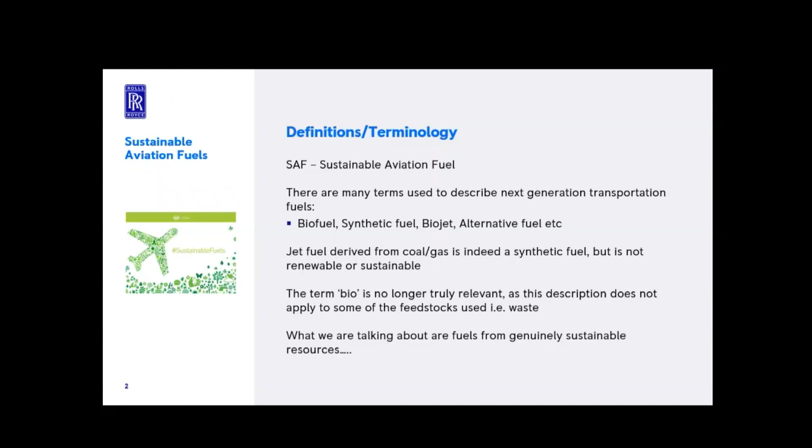If we take a big step back, why do we bother doing all of this stuff? There was the Paris Agreement that was agreed in 2015. That's not an aviation target, but an overall climate target that we need to control global warming to no more than 1.5 degrees relative to pre-industrial times. To be honest, I haven't found an exact date, but it's around 1995.

Because if we trend what the average temperature of the ocean has been between 1995 and now, it's increased. If it continues to increase at that rate, then by 2050, a large portion of the Earth will no longer be inhabitable. So that was the target that was set by the Paris Agreement. And there are many different industries which contribute to CO2 production, like the forestry industry, agriculture, and all that kind of stuff.

And the contribution of aviation in the overall perspective is relatively small. So it's about 2% of the total CO2 production, of which business aviation is also an even smaller percentage. But the reason that aviation needs to do this is that aviation produces a significant amount of other pollutants that are non-CO2, and it's considered to be the fastest growing polluting industry over the next period of time. So that's why we have to do this, and why we want to do this.

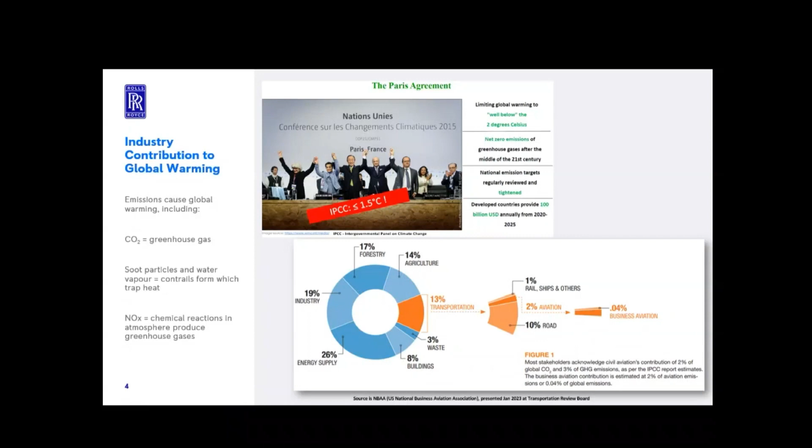Aviation's contribution to global warming is not just a CO2 effect, it's also a non-CO2 effect. And if we had continued to go without the pandemic, if we track the red line to the top, the contribution to global warming by 2050 is predicted to be about 0.1 degrees Celsius, which might sound really small, but it's massive. So that's part of the reason why we need to do it. And then the other lines are kind of showing what would be the targets that we want to set. And so the target based on the Paris Agreement is that we have a long-term decline of minus 2.5% per year after 2024.

What has the European Union done to mandate this? They've set minimums for the amount of SAF that needs to be provided at European airports. And this means that every airport across the EU, by different periods of time, needs to be fueling aircraft with a fuel that's blended with a certain blend percentage of SAF. So the targets, at least in the short term, are 2% SAF by 2025, 6% SAF by 2030, 20% SAF by 2035, and 70% SAF by 2050.

And a subset of that blend percentage is also a power-to-liquid type fuel, which is a fully synthetic fuel, which I'll describe briefly on another slide. Yeah, and those requirements will apply for any flight leaving the EU, independent of where it's landing. So that's a bit of the background on why exactly we need to do this and why Rolls-Royce has supported this initiative so much.

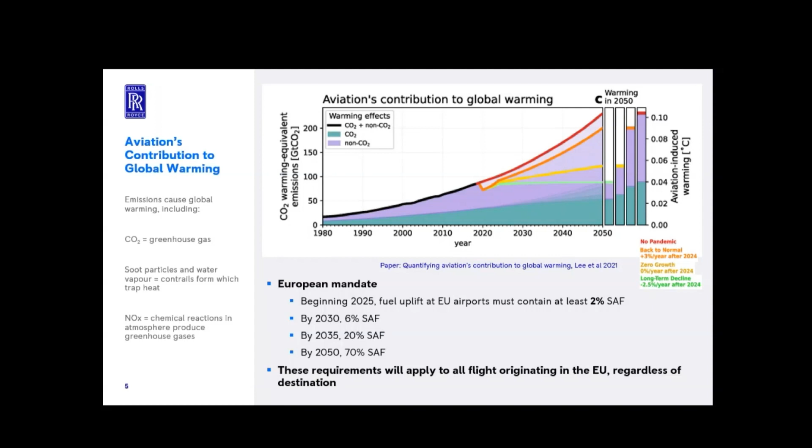There was then the net zero report that was published in 2021. And this report describes how our company will be able to hit net zero by 2050. It's quite a massive report. It's publicly available, very interesting stuff. But from a SAF perspective, there was a major target that by the end of 2023, we will have tested all of our in-production engines on 100% SAF, which for business aviation was the 710, the 725, the Pearl 15, and the Pearl 700, which we achieved by the end of last year. So we've hit that target. And I'll discuss a little bit about the results of those tests later on.

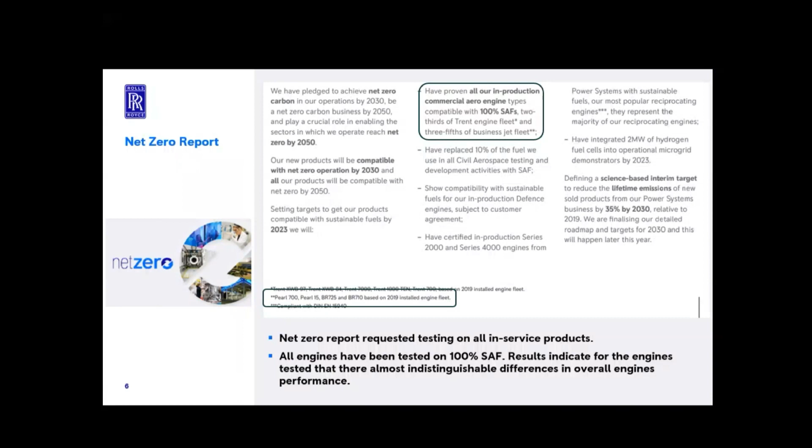Okay. So that's the background. And then what is the overall strategy? This is not just a purely Rolls-Royce strategy, this is an overall strategy. And I think one thing that's really important to say about sustainability and about SAF is that this is not about Rolls-Royce and what can Rolls-Royce do, that's part of it, but this needs to be an industry-wide collaboration. We can't do this alone. We need to have support from the government, from our airframers, and from other engine manufacturers.

So the journey to sustainability is going to be very, very difficult. It's not an easy problem to solve. And I think the boundaries of our company have a huge amount of influence, and we need to be working together with the other companies in our realm to really be making a difference.

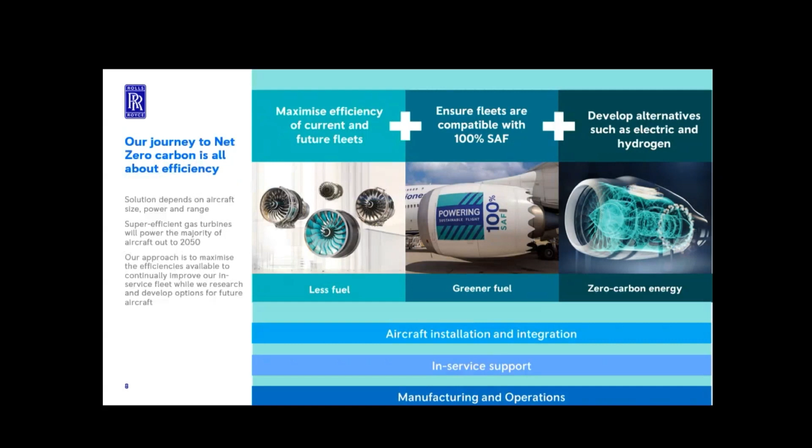So overall, the journey to net zero, there's many different ways to look at it, and we need to pursue multiple solutions. So the first one is obviously burning less fuel. So if we make highly efficient engines and then aircraft that reduce the amount of fuel that's burned, that's a really significant part of getting to net zero, because the less fuel you burn, the less CO2 and other pollutants you'll then produce.

If you go to the far right, these are alternative sources of aviation. So electric and hydrogen, those are considered revolutionary technologies. Those would require a very new certification process. There's a completely new infrastructure that would be required for those. But those will take more time, so that's not something that we could implement. There are also not necessarily solutions for the full range of different flights based on those types of technologies right now.

And the reality is that we have a fleet of many aircraft that are flying around, and those will continue to fly for another 50 years. And so you need something that, without massive modification or investment, would be able to become less CO2 negative. And that's where SAF comes in. So SAF is really a greener fuel.

And these three types of activities need to be really happening in parallel in order for us to hit our net zero targets. And this sort of shows the civil aerospace market and technology landscape until 2050. So there's many different types of flights, and every different type of flight might have different solutions that are relevant to them. So UAMs, for example, there's a more feasible possibility that could be serviced by a battery technology.

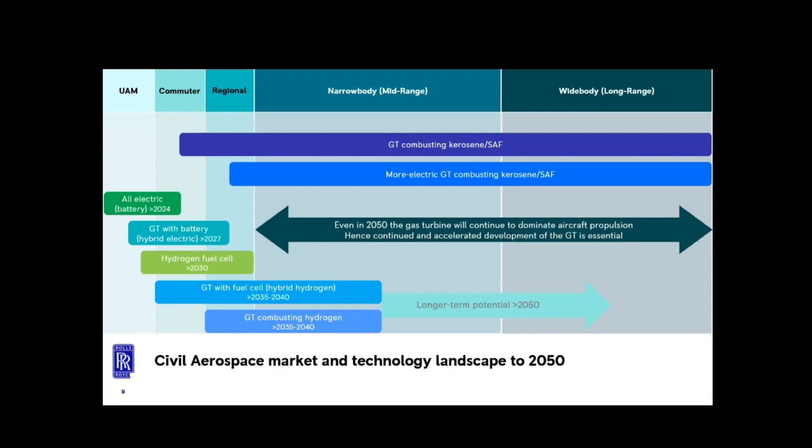And there just isn't a battery that exists at this time that could power an aircraft across the ocean. And so those types of flights will very likely continue to need a gas turbine burning something to be able to service. And that's where SAF comes in as a relatively elegant solution. There's a lot of long-term potential for the other types of technologies, but that's going to be, from a certification perspective, much more challenging, and it's still quite new in its development phase.

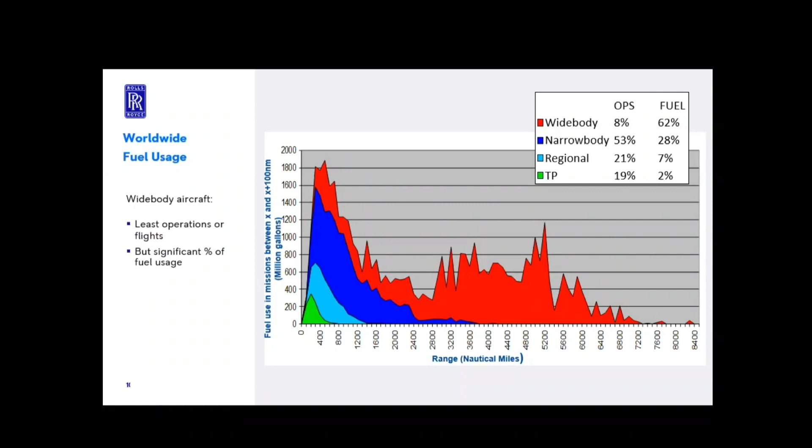Okay, so a little bit more about SAF itself. How is SAF made? So there's currently the different types of SAF that are approved. There's 8 different pathways that have been approved with ASTM, and currently they're all made from bio-waste mass. So what that means is that there's different waste products that could be collected from different industries, and those can then be processed and then used to create a kerosene equivalent fuel. So there are several different types. There's Fischer-Tropsch process, which is basically making fuel out of garbage, carbon garbage.

Hydroprocessed esters and fatty acids. So most of our engine testing has been done on that type of fuel. That fuel is primarily produced by using used cooking oil. So that's a very feasible way of making fuel. Then there's other pathways, which include agricultural wastes, oil, fats, and greases.

And then algae is an interesting one, because algae is something that's very quick to grow. It requires like no water, and it can be grown in mass amounts. This pathway, I haven't actually seen any fuel coming out of it, because it's still in a relatively small volume, but there's a lot of potential to be able to produce fuel using that type of pathway.

And what that means, at least what's been approved now, is what's called a drop-in solution. So a drop-in solution means that you can blend up to 50% of your SAF synthetic blend component together with 50% kerosene. It then gets recertified, which means a sample is taken. It's compared against the specification for a fully kerosene fuel. It gets relabeled as Jet A1, and then off it goes.

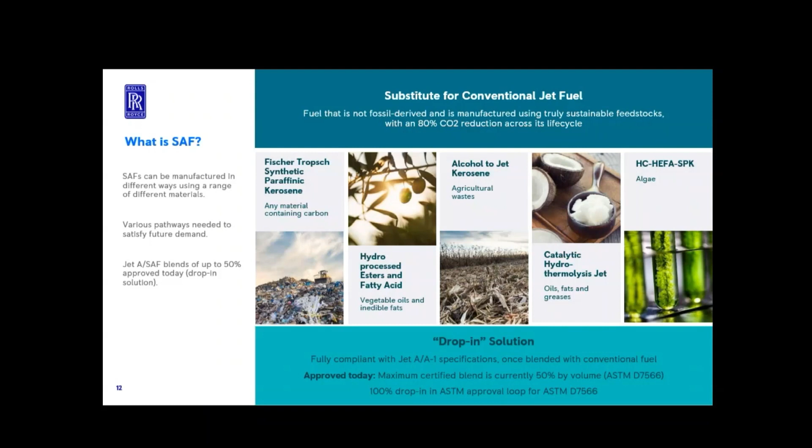So on the different phases of the ASTM process, there's Rolls-Royce, GE, Safran, Boeing, and so on. And they all sit there and they're responsible for reading all the reports that are generated after a certain amount of testing. And then they agree, yes, we approve at this phase that the fuel is meeting the requirements or not. It takes years to go through this process. This is not straightforward and a significant amount of testing.

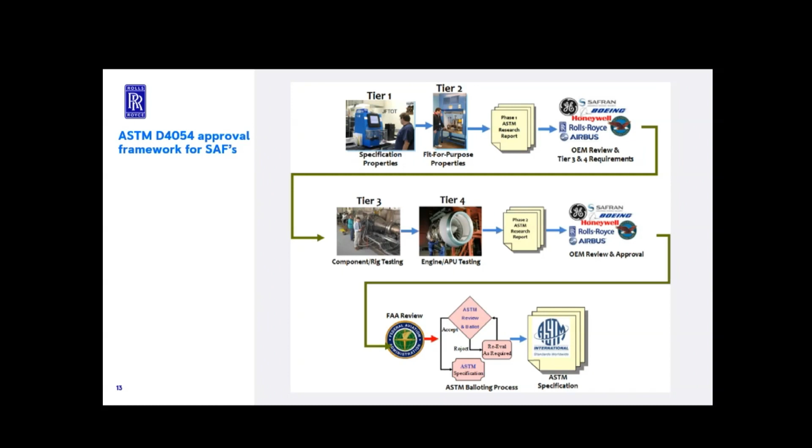But just to give an overview, every single pathway that will get approved has to go through this whole process to be able to show that it's in fact usable in the field. And this process is defined by D4054. That's the approval process specification.

The SAF landscape is definitely evolving. So like I mentioned before, there's 8 pathways that are already industry qualified. Some of them were qualified back in 2009, which is really interesting because SAF is not new. It's been approved for quite some time. It's just that it's never been promoted that much. And the big reality about SAF is just it's not available. That's the big issue about it. We're hoping that that will improve. And there's a lot of initiatives in place, like the ones I mentioned before by the European mandate, that it will start to increase. But yeah, some of the pathways have been approved since 2009.

And some of those existing pathways are approved up to 50%. And there's a lot of work ongoing now to demonstrate that it would still be considered a blend component, but you could use it up to 100% and it would still get recertified as Jet A1. So it's 100% sustainable. It's not a fossil-based fuel at all, and it would be qualified at 100% to be used on an aircraft. That's ongoing. That's sort of the second item here about 100% drop-in. So what's happened now is that the spec has been approved by the ASTM on what that looks like. And then the work is ongoing now to see how to get that approval for a fully SAF fuel at 100%. That would be ideal.

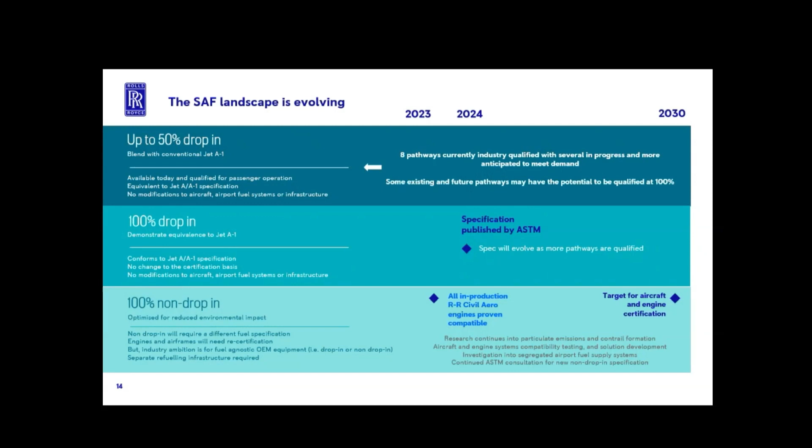These are the various feedstocks and the blend components that are available. A8 is the last one that just came in, a bit about how they're made and what percentage they're approved up to.

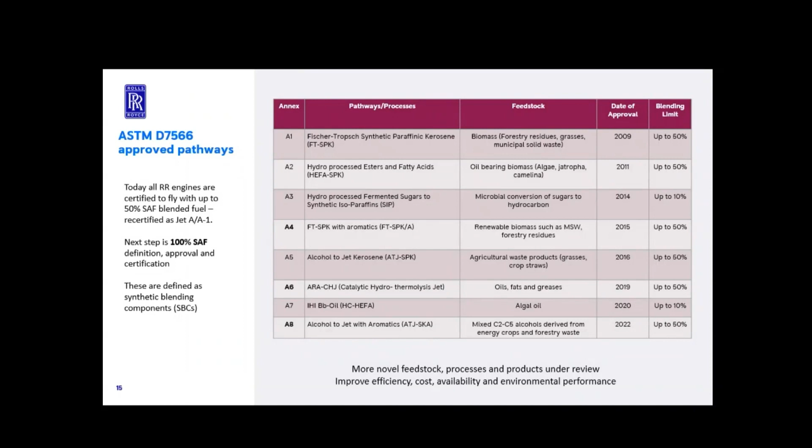So the A4, A6, and A8, these ones have the potential to be able to be used at 100% and still match a drop-in specification. So we haven't done any engine testing on those 3. We did all of our testing with A2. But there's a lot of work ongoing, and eventually, when those fuels are available at a certain volume, we could look into them more.

A little bit more about synthetic blend components. So there's a lot of different companies that are popping up all the time that are coming up with new feedstocks to be able to produce SAF fuel. So maybe some of the ones that are a little bit more well known. So Virent. So anybody who worked on the 725 flight would know about the Virent one.

So Virent in itself is just a synthetic aromatic, and that was used on the 725 flight tests because the engine didn't require it, but the fuel system supplier from Gulfstream said that they needed to have some level of aromatic due to some concerns about fuel leakage on the aircraft side. So we ended up blending with this Virent component.

I mean, a synthetic aromatic component is very powerful because if you blend it with a HEFA fuel, you would get a drop-in fuel. I would imagine in the future, this synthetic aromatic blend component will no longer be relevant because you could get it via some of the other pathways on their own. But that's a company that a few people might be quite familiar with.

Phillips 66. So this is a company that's basically taking car tires and then converting them into rubber pellets, and that could be used to make synthetic fuel. And this is one of the fuels that's looking like it has potential to be used in co-processing: all fossil fuel goes through a processing plant. You can take the same processing plant and inject a sustainable feedstock at the same plant and use the same process and get sustainable fuel out the back. And this is one of the feedstocks that's looking promising to be able to go through that process.

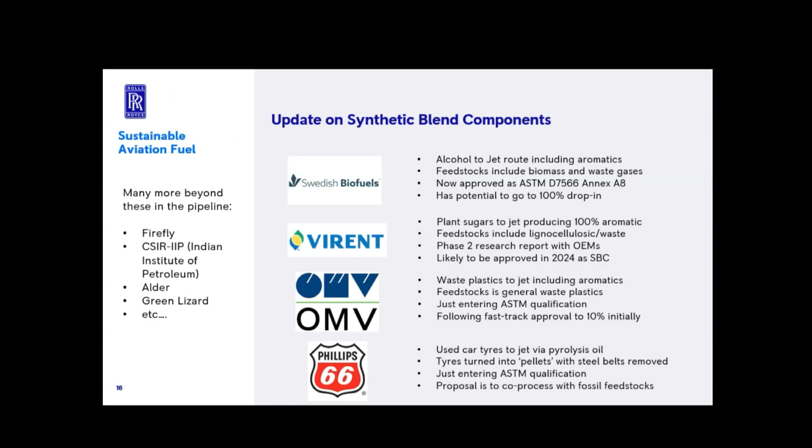SAF is not all rosy. There are definitely some challenges that have to do with it. The biggest one is cost. So SAF fuel will cost 2 to 5 times as much as kerosene, at least it does now. A lot of that is going to have to be managed. Does that mean flight prices will increase potentially? How can we manage the cost of the fuel?

I think that the more that it's available, the cheaper it will be. The more novel feedstocks that are developed, that will drive costs down. But at the moment, SAF is significantly more expensive than kerosene is. Actually, in the United States, SAF is cheaper than kerosene. The government has put in this Inflation Reduction Act, which affects that price. But definitely in Europe, SAF is significantly more expensive than kerosene is. So that's something that needs to be managed.

It's also scalability. So right now there's about 6 million barrels of aviation fuel used a day to power aircraft, which is about 300 million tons per year. And by 2050, considering the increase of the population of the Earth, increase of the population of the middle class, etc., we're going to need about 500 million tons of SAF a year to support aviation. That's a massive number. So there's going to be quite a lot of investment made to be able to get, let's say, 70% of that to be sustainable.

So the investment required, I already mentioned that. And then it really needs to come down to policies and investments, or initiatives that will be coming from the government. But I think there's no way we will be able to minimize global warming from an aviation perspective without SAF. I don't think there's any other elegant solution available right now. And SAF is not the end of the story, but it's a really good bridging technology until new technologies are available.

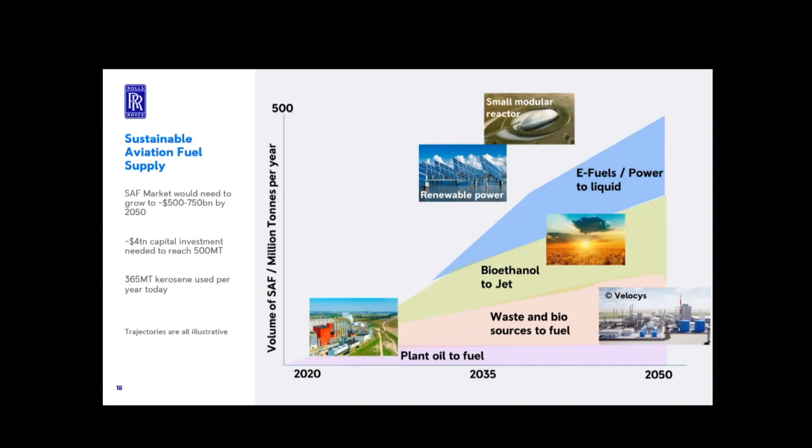A bit about power to liquid. So power to liquid fuel is basically using power from a sustainable source, so wind or solar, and then taking water to produce hydrogen, and then doing some sort of carbon capture and putting that through a Fischer-Tropsch process, and then creating liquid through hydrocracking. So it's a relatively simple chemical process.

There are a few facilities that are already open, but they make very little volume, at least right now. And the real challenge with this type of fuel, at least for the moment, is finding an affordable, sustainable energy source. The thing is that with a good collaboration in different parts of the world where the sun shines, I don't care if the process is efficient or not, because the sun's going to shine anyway. So efficiency is not the target, but being able to get an affordable energy source is a challenge.

This would be extremely elegant, because if you could set up these types of facilities right near airports, then you would be able to produce sustainable fuel near an airport. With the exception of the month of May, Berlin has been beautiful, but generally it's pretty gray here. It would be very difficult to produce everything based on solar power, but looking at other sustainable energy sources like wind or nuclear, that would be another option.

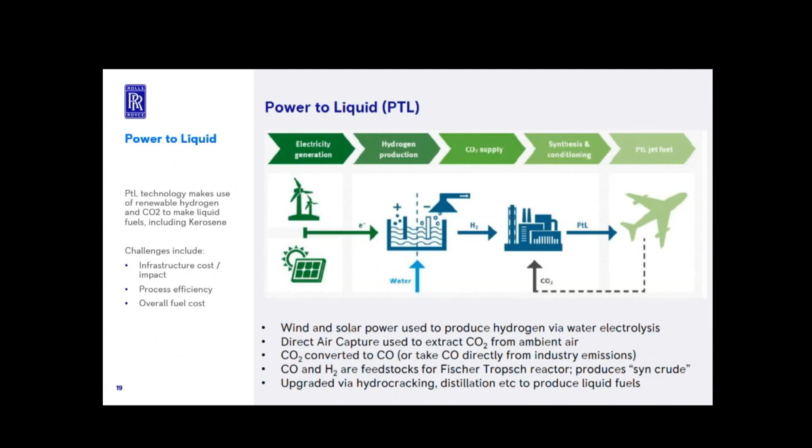So overall process efficiency, infrastructure, and costs, because these types of facilities don't exist yet, so they would need to get built. You have to keep in mind also that when you put up a new facility, you produce a certain amount of CO2. So it's all about the life cycle. So there's a big challenge about the initial investment, the initial production of CO2, and then making sure that with the fuel that you're using, reducing your global warming counteracts the increase that you would have by setting up all this infrastructure. So it's not easy.

So overall, what are some of the benefits of SAF? I've touched on them already. So overall life cycle reduction of CO2. The other thing about SAF fuel, at least the bio-based SAF fuel that we've been using right now, is it has a higher energy density by mass, which is very attractive. If you have an aircraft that's not fuel volume limited, that means that for the same mass, you could fly longer because you carry more energy in the wings of the aircraft.

If you have a volume limit, then it kind of works in reverse, because SAF is less dense than kerosene, and you might actually have less energy. But at least for business aviation aircraft, we tend not to be volume tank limited. So that would be a benefit, to be able to sell additional range on some of our products.

And one of the big benefits from an environmental perspective is the reduction of contrail formation. So contrails are a result of unburned particles inside of a kerosene fuel, which is nvPM. So those particles, when they come out the back of the engine at certain altitudes and temperatures, they will crystallize and form these contrails. And contrails, particularly when they're over the water, when the ocean heats up over the daytime due to sunlight, the heat tries to rise away from the planet and go into the atmosphere, and then because of contrails, it reflects back down and reheats the ocean.

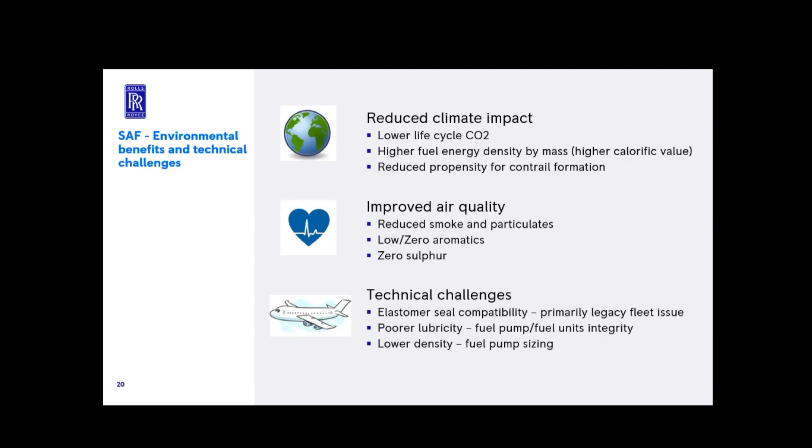Okay, I'm going to complete the lecture with a little bit about all the testing that we've done, us and our friends in Civil Large. So I was involved in almost all of these tests. It was a lot of fun working with really, really great people, also doing cool things. So these are the 4 engines that we've tested.

On ground in business aviation. So the Pearl 15 we tested in August of last year. It was a joint venture between the hydrogen team and the SAF team. Cool teams working together. That was successful. The Pearl 700, I think, was the first. Well, it was definitely the first business aviation ground test that was done in 100% SAF. That was also done here in Dahlewitz.

The Pearl 10X, that was a really, really good learning point, because that engine was also used where there were back-to-back emissions measurements done on the engine. So doing the emissions runs on kerosene and then repeating those runs on SAF confirmed a lot of our predictions about emissions coming out of the engine on a SAF fuel versus on a kerosene fuel. So a really good learning point, also a good confirmation that our predictive tools are correct.

And then the 710 was the last one we did at the end of last year on a HEFA fuel, and that was done in Rolls-Royce Canada. Valuable lessons were learned on every one of the tests, and I think the overall conclusion is there are no significant impacts on the performance of the engine running on a 100% SAF fuel versus a 100% kerosene fuel. So that was the takeaway from pretty much all of the tests.

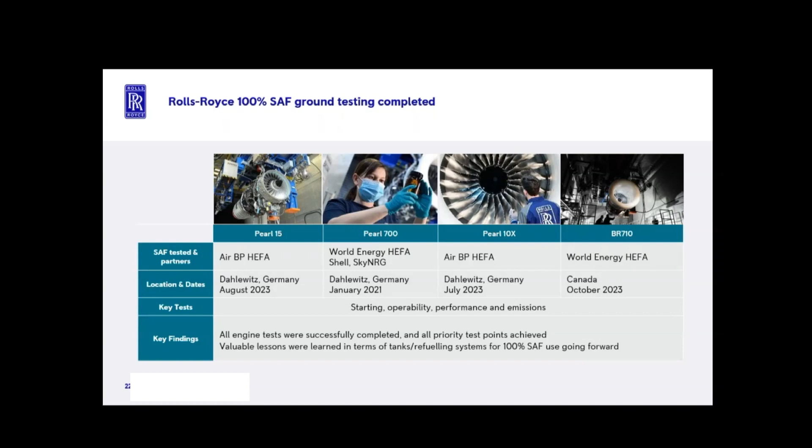On the Civil Large side, they had to test more engines than we did, but a lot of really good learning points on that one. The UltraFan, I think, is an engine that probably everybody's familiar with. So the UltraFan ran their entire EDP program with the one engine, but they ran that one engine entirely on 100% SAF, which was really, I think, great for such a product. And yeah, so these were all the engine tests that were happening on ground. Very similar conclusions to what we had on business aviation. So that was all completed before the end of last year.

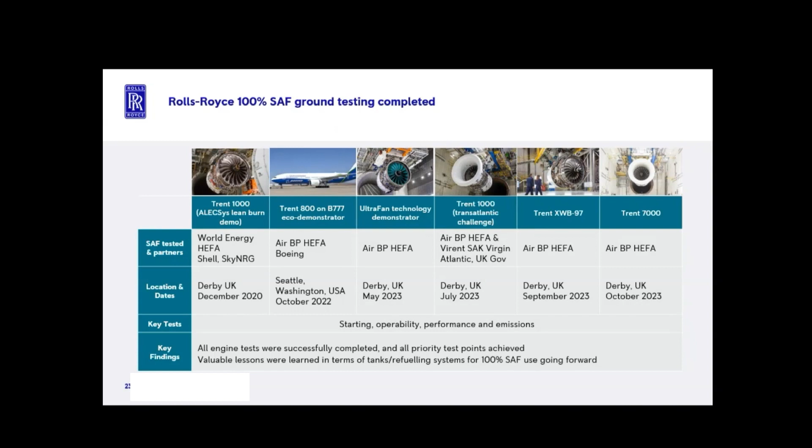And then a bit about flight testing. So we did several flight tests. The one that I was involved with, and a few people in the room were also involved with, was on the BR725 on the G650. So that was done at the end of 2022. That was a single engine on 100% SAF. This was the first time we did a drop-in SAF. So this was a blend between a synthetic aromatic and a HEFA fuel. It wasn't 100% drop-in. The density was a bit below the spec, but close enough. Single engine, and that was a pretty cool experience, with really, really good results.

And the greatest feedback I think I got from that was from the pilots. So the pilot said, if you hadn't told me there was another fuel in the tank, I would have never known. So the handling of the engine is absolutely not affected by SAF, which is, I think, the best feedback you can get.

Other tests that were done on the civil large side, on the Trent 900, on the A380, this was on the flying test bed. So these were 2 of the engines out of the 4 that performed on SAF. The ECLIF program was also doing in-flight emissions measurements on 100% SAF. 1 engine on SAF, so it confirmed that you have a reduction in particulate matter on the SAF engine compared to the kerosene engine. So a lot of really good learning there.

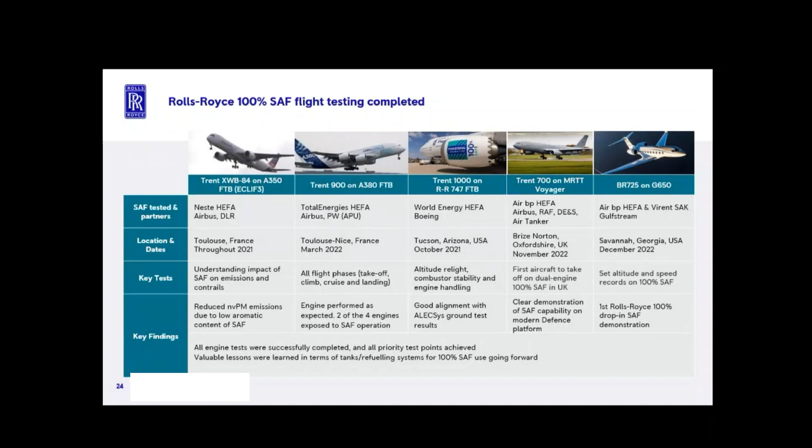And finally, this was a huge accomplishment at the end of last year. So this was a commercial aircraft that flew from London Heathrow to JFK, New York, carrying, so they weren't allowed to call them passengers, they were called observers. But there were 100 observers on the aircraft, including Richard Branson and several of our Rolls-Royce colleagues and a lot of journalists. And both engines were 100% sustainable fuel.

And the beauty about that flight was that they landed in JFK, then there were a whole bunch of pictures. Then they disembarked the passengers, they made no modifications, and then new passengers got on, they fueled with kerosene and it flew back to London.

That's one of the most important things about SAF, that not every airport in the world will have it. So you want to be able to land at an airport in some country that doesn't have SAF and still be able to tank. You don't have to fly to an airport that has only SAF, because that would make it not so usable everywhere. And this aircraft is a perfect example of that. You could land, take the people out, put normal fuel in, and then just keep flying. So great accomplishment in the company.